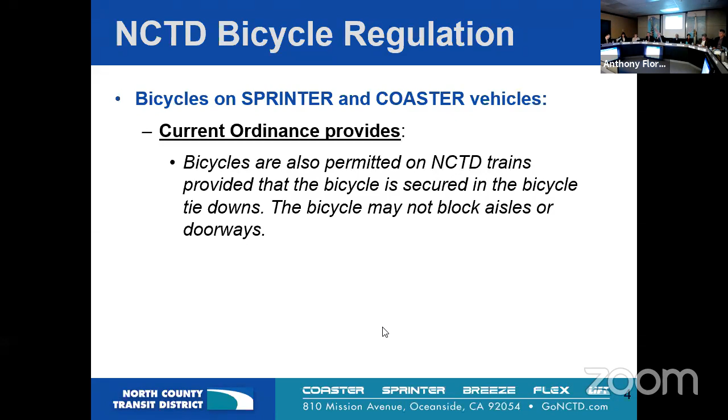Currently we have this one sentence in ordinance 3 that basically says bicycles are permitted. They have to be secured in tie downs, and they can't block aisles or doorways. We just had too many on some of the crowded modes, especially on Sprinter. So this is the proposed revision. I know it's a lot of red, but we've added in some significant improvements.

First, we've added that bicycles can't be left unattended, so that if we do need somebody to move or relocate, they are there and available. We've kept the rule that in no event can they block the doorways, and we've added additional guidance in terms of impeding preferred seating or wheelchair accessibility areas, and that they do have to be moved or relocated upon any direction by our authorized enforcement personnel, which could be an operator, conductor, or any of our TAs. If they are left unsecured or unattended, they can be subject to removal if we do run into a problem. This is pretty much the entirety of the proposed change to ordinance number 3.

It's in section 2.2.a.8, and we have a black line there. To give you an example of what we're talking about, on the Coaster here, we have several bikes in the proper location. There are bicycle tie downs there. That one would be in compliance.

Here on the Sprinter, this one needs a little bit of improvement. It's not totally in the area, it's not tied down. On the Sprinter, we are going to be limited to 5 bicycles—there are essentially 5 tie downs in all of the cars. On the Coaster, depending on which car you're in and how many cars are in the consist, that will change. Some have multitudes, some have designated wheelchair spaces, so that will be a little bit different on the Coaster.

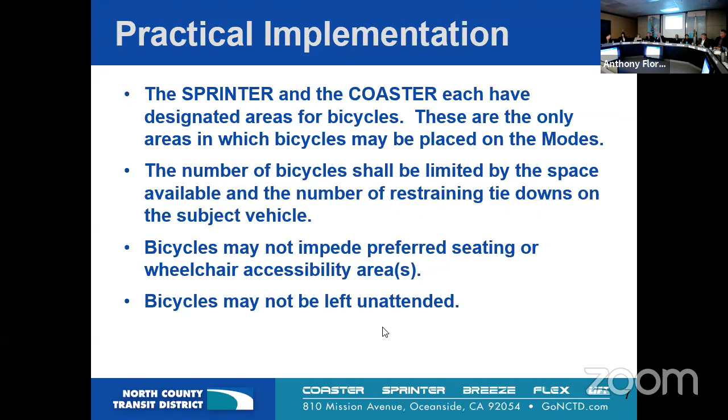We did get one question, basically related to what does unattended mean? Does that mean I can't use the restroom? If you're on the Sprinter, please don't use the restroom—there isn't one there. If you're on the Coaster, that's totally fine, you can go to the bathroom. What we're talking about here is if one of our authorized personnel is requesting that one of these be moved, that person is available. If they go down two cars to meet up with some friends and there's nobody there to take care of that bicycle, then that is going to be subject to removal.

In the same ordinance, and has been there since the beginning, our designated staff is authorized to use discretion when we apply these rules. So if somebody goes upstairs to say hello, or if they go to the restroom, we're not going to be removing a bicycle. But if nobody's available for 45 minutes while we're trying to relocate it, that will be a problem.

So that is the entirety of the change as recommended. There are 5 parts to this because this is a public hearing: receive the proposed modifications, waive the full reading of the ordinance, receive public comment, close the public hearing, and then adopt the proposed modifications to ordinance number 3, the staff's recommendation. I'm here for any questions you may have.

Thank you. I don't have any public speakers, so does the board have any questions or comments? Vice Chair Feller.

What happens if somebody gets on early in the trip with a bicycle and all of a sudden a load of a number of people get on that are disabled or need the access or the places that they're placing the chairs? How does that work?

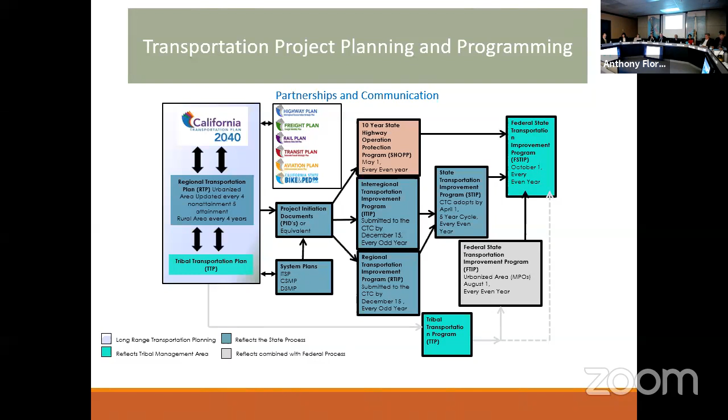Just to illustrate that as we move from planning into programming, once we have dollars realized on a project—funding's not unlimited, right? So it's a matter of balancing our priorities.

Under the overarching mission to provide mobility for all travelers, we need to ensure that the processes, plans, and projects we're moving forward are done safely, that we're providing the safest transportation system in the nation for users and workers, and that we're able to maintain and preserve our existing system, or fix it first.

We want to make sure we can maximize our interregional mobility. For us, for the state, Caltrans, interregional means more of those longer range trips—100-mile plus trips. We also want to make sure that what we put forward supports goods movement and that we're doing this in a sustainable way. We're balancing those first four priorities with our local and regional needs around system performance—are we addressing congestion, how are we looking at moving people locally, what's the mobility here?

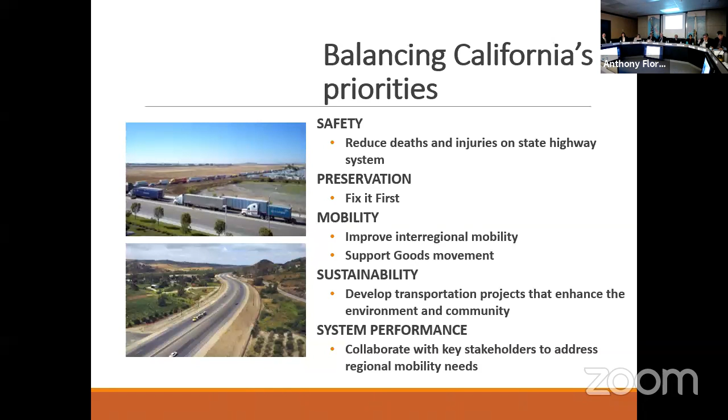So putting it all together, it seems to be fitting all within our current footprint, densifying within the westerlymost areas of our region. And what this is saying is that the existing infrastructure, our current highway network, will still need to remain

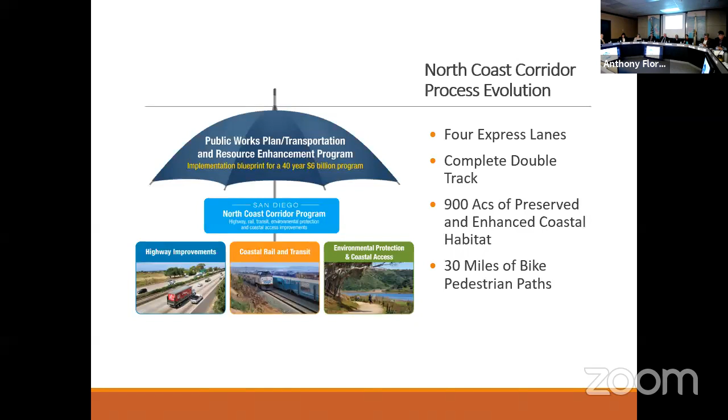Moving forward, over the last 5-6 years there have been new challenges. There's always new challenges hitting a region: reduced revenue, rising project prices. And we've talked about technology, right? Uber and Lyft, the idea of how that could help us with the first mile, last mile, wasn't thought about 5, 6, 7 years ago. The importance of VMT wasn't thought about 10 years ago. So those are examples of how the visions need to be reactive to those changes.

The good news is, as Ann pointed out, we've got a good infrastructure to start from. We've got a good base. The region has grown up around these transportation corridors, your corridors, our corridors, and they're not to be abandoned. The question is, how do we maximize and change those corridors to reflect today's demands?

This shows you your network. Don't need to go through the specifics, but on the I-5, these are from the region's RTP, which was last updated 2015-16. Every 4 years it gets a chance to be reevaluated. Given all the changes that have happened over the last 4 years, we can bring a different blend of projects. We can reprioritize projects.

When you look at just the freeway components in the current RTP, we're building 1 lane in each direction on I-5 right now. The ultimate vision is 2 lanes in each direction as an express lane. Those second lanes in the RTP are towards the back end, 2030, 2035. Same idea over on 78, but it's 1 lane in each direction in the RTP.

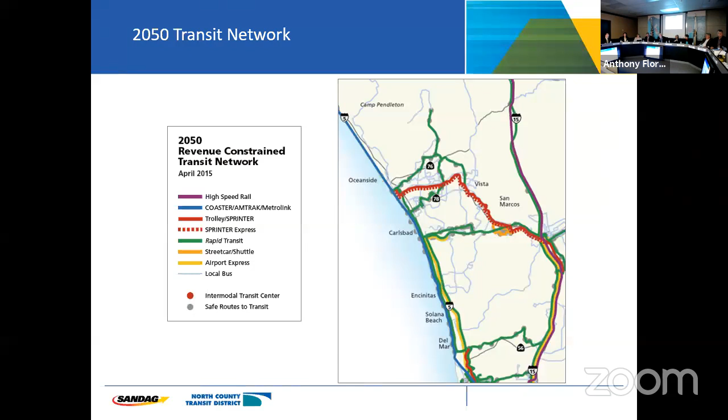Yeah, definitely, and this infographic is trying to communicate that. For example, as connected vehicles become more prevalent, you could convert more general purpose lanes and manage them just for connected vehicles. Or you could decide to use the existing carpool lane as a BRT lane, like we're doing in the Bay Area, in the South Bay. It's a question of how demand changes and whether there's enough ridership to trigger that. A good example: when we started construction three years ago on I-5, we anticipated opening those carpool lanes as carpool lanes only. We're already starting to think about congestion pricing them instead of just carpooling. Haven't made a decision yet, but that shows how flexible we are, because some of the carpool lanes are already full and not really working as intended at the south end. So that's why we may need a new strategy there.

Okay, thank you. And my last one was a comment -- I don't think this picture is the San Elijo Lagoon, I think it's something further north. Oh yeah, I think it's Batiquitos. Yeah, I thought it was Batiquitos too. Sorry. No, you're right, no worries. My comments still hold though -- look at all that extra parkland. Yeah, you got it. Thanks.

I did want to say, on the transit vision that's in the RTP now, there's potential for changing approaches or strategies. The focus was always Coaster -- I think that's appropriate, let's finish the double track, get more frequency, try to up the ridership there. Other corridors have BRT. How does BRT and transit work together, or with rail?

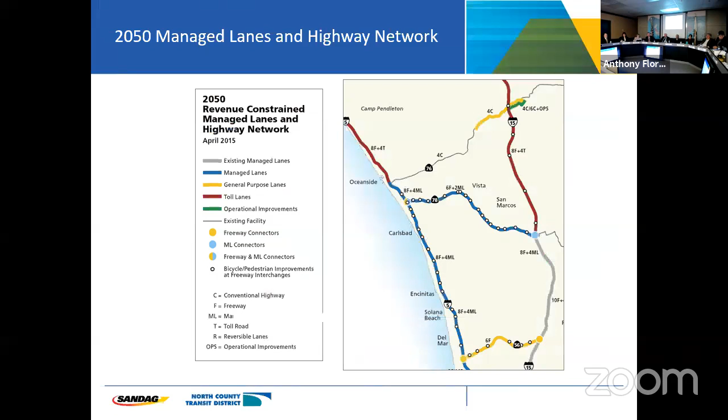And the 2050 plan shows a 78 with managed lanes across the corridor. But on your next slide, there's a corridor re-envisioning. That I don't remember coming to a vote at SANDAG, but this is no longer a managed lane down the center of it. This is managed lanes for part of it and then other fixes along the way. What is this re-envisioning?

I agree with you, we have not - there's no consensus on this vision yet. I think we, Caltrans, have been working to begin to think like, if revenue is not available, how do we get some short-term relief without the whole package?

And so these are some ideas, options that we could present to the board. We don't mean to speak for the prioritization of the different projects.

You talked about the east side being more congested at the 15 and the 78. I noticed there you got a 2025 with little asterisks, and then the I-5 and 78 interchange with the same dates, bubble number 1 and 3 on there. Is that for planning? I'm just wondering what your dates mean.

The dates in there are the current RTP adopted dates that the board has agreed to. For start or for finish? Generally it's a 5-year window, so it's probably somewhere we're going to start in that 5-year window.

Okay, but the asterisk sort of denotes that the whole plan is moving and prioritizing, and in general things seem to be slipping away from us, not advancing in general across the county. I mean, that's, we just...

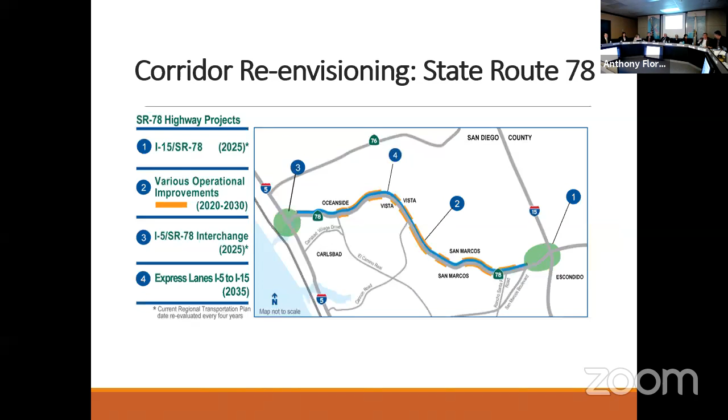All right, thanks. I just wanted to say one more thing. I was 18 in 1966 when I got my first speeding ticket on Highway 5. You're older than I am, I can tell. Yes, yes. All right, thank you both very much.

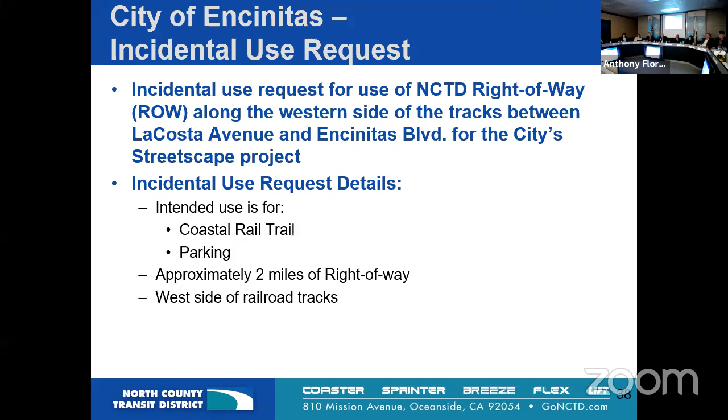The incidental use request as it relates to the city of Encinitas - they submitted a request to NCTD for use. It goes along the western side of the tracks between La Costa Avenue and almost to Encinitas Boulevard, for the city's streetscape project. The intended use as provided to NCTD is for a proposed coastal rail trail or for parking. It's approximately 2 miles of right-of-way along the western side of the railroad tracks. The specific area has not yet been defined.

In December of 2018, NCTD provided a formal response to the city based upon the 30% and 60% design plans for the project. I'm going to go through some of the significant and material issues that we outlined in our response.

One is as it relates to NCTD's property ownership. The city will be required to enter into an agreement with NCTD for the use of the right-of-way, and that agreement will incorporate any city liabilities associated with any deviations to NCTD standards, and the agreement will require board approval.

Our response also explained the preservation of the right-of-way for future uses. The proposed project needs to be compatible with long-range regional planning, and we requested that a consistency review to the regional planning be performed by SANDAG, considering the double-track coastal rail trail, as well as handling the stormwater drainage within that area. That consistency review was provided by SANDAG just last week.

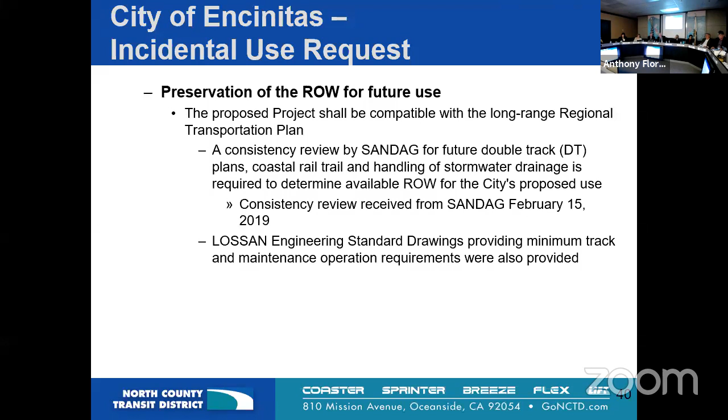We also indicated that any use of the right-of-way needs to consider NCTD's engineering standard drawings, providing minimum track clearance and maintenance operations requirements. So just a little bit, I'm going to sidetrack here and talk about our engineering standards.

We actually have two, and I ate my Wheaties this morning to show you. We have engineering standard drawings as well as design criteria for the San Diego subdivision. This was done and adopted by NCTD and SANDAG both in 2017. So these are the guidance that we follow for all of the projects within the corridor.

Back to our response on the incidental use request - we indicated from a safety perspective that all of the city's improvements need to be fenced to create a separation between the improvements and the active right-of-way. Then from an operation and maintenance perspective, we reserve and require unrestricted access to the tracks for inspection and maintenance.

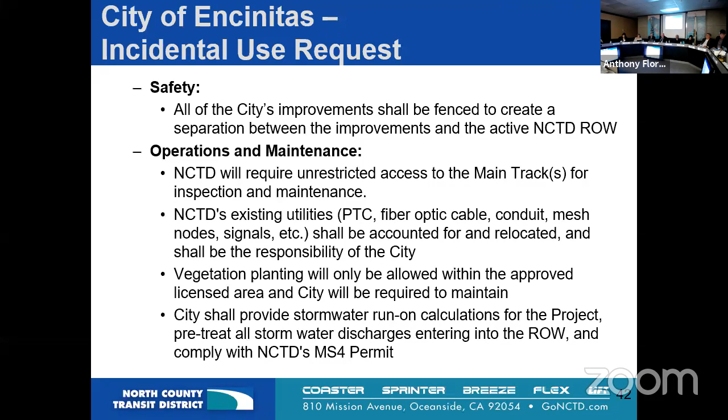Any existing utilities in there, we have our PTC fiber, other fiber optic cable in there, shall all be accounted for and relocated at the city's responsibility. We also indicated that any vegetation planting within the right-of-way has to be within the area that's licensed to the city, and the city would be responsible for maintaining that vegetation, and that the city will need to address stormwater and water issues within the right-of-way.

So our next steps at this point: we have to finalize an incidental use agreement that we'll be bringing back to the board. We have to come to terms on that first. So we're anticipating March. And we will continue to review the city's project plans to ensure that they conform to our incidental use agreements and our policies and procedures. So that's it as it relates to incidental use.

Any questions before I turn it over to Bruce? Okay, it's all yours.

Which button? Oh, Anthony's getting it. Just one second there.

For those board members that don't know me, I joined NCTD in the year 2000, worked here until we finished the Sprinter project, and then transferred to SANDAG with the Senate bill that moved our capital program down to SANDAG. So I've worked for some time on this corridor.

Yesterday, Matt sprung this on me and asked—Mugs wasn't available to do this presentation, so I was asked to do it at the 11th hour. So it's going to be fairly brief.

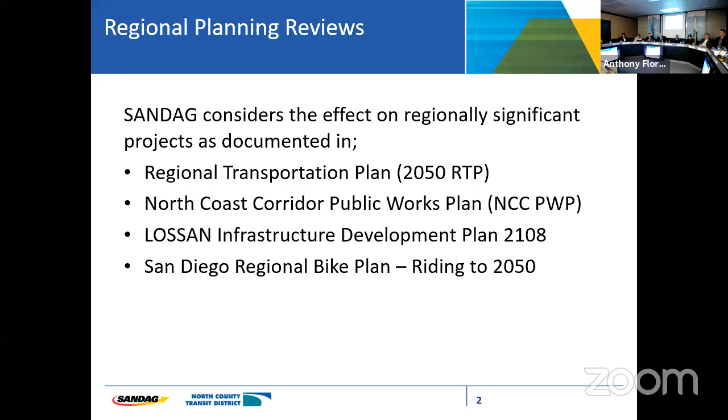So we looked at the regional transportation plan, Caltrans' North Coast Corridor plan that we developed with Caltrans. We also have a LOSSAN infrastructure development plan, which lays out the prioritization of the LOSSAN double tracking projects. And then we have the San Diego regional bike plan. In all these plans, there's a coastal rail trail through Encinitas.

I just put the covers in—Matt asked me to make this sort of part of an awareness presentation as well. There's a lot of plans. We do a lot of planning at SANDAG. So I just put the covers there.

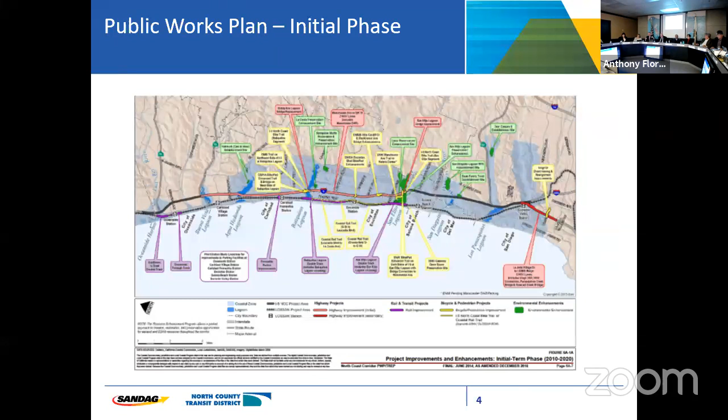One interesting part, this is from the Public Works Plan for the North Coast Corridor. This shows all the projects envisaged in the first phase of the North Coast Corridor program. And again, the Encinitas Coastal Rail Trail is in the plan in the initial phase.

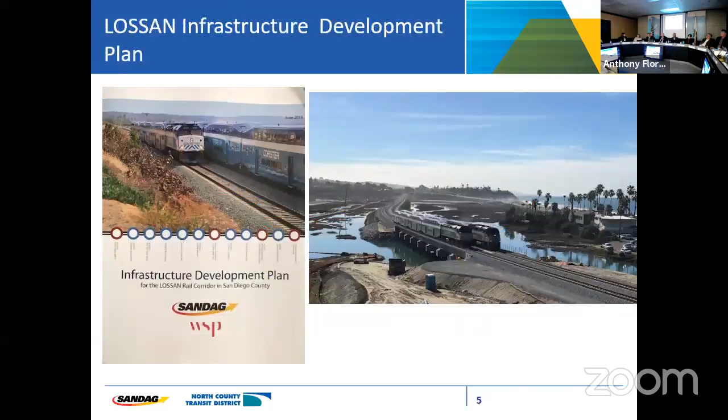Then we have the infrastructure—our LOSSAN infrastructure plan. We've got a host of projects currently in design and construction on the LOSSAN corridor. One photo there shows the San Elijo Lagoon double track, which was brought into service last month.

As Tracy said, we spent quite a few years developing this LOSSAN design criteria, and it lays out requirements for things like flood protection of the tracks. So one of the national requirements we have is that we design all our projects so the tracks are out of the water in a 100-year flood. As soon as the tracks go underwater, trains can't drive over them. So flooding is an important part of the design criteria.

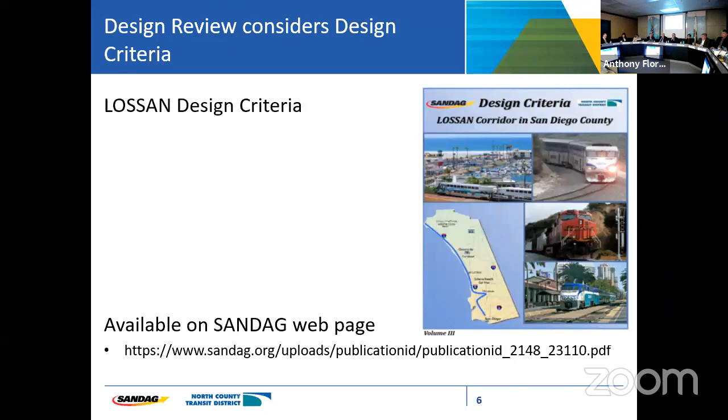We used to stop trains in Sorrento Valley every year until 2015, when we raised the track there by 5 to 6 feet. So there's a lot of good information in that design criteria. However, that design criteria is meant for interstate railway. It's stricter than a city criteria or a county criteria. We go to a higher level because we're dealing with interstate railway.

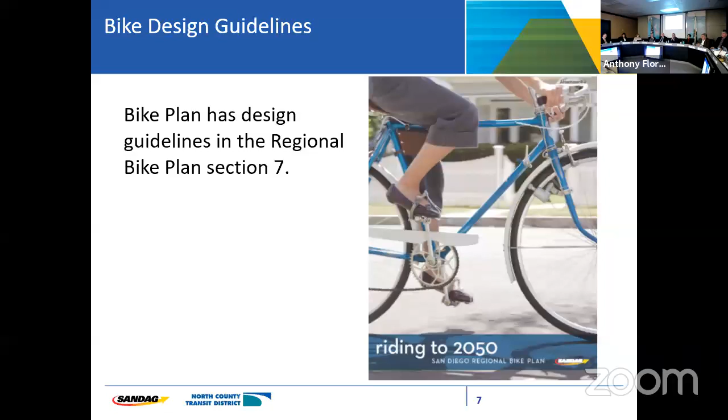Again, we have the regional bike plan out to 2050, and that has section 7, which gives the design guidelines for bike trails. These are the addresses where all these plans can be found.

So we looked at the bike trail running through Leucadia, and at a conceptual level, there just isn't enough room to fit everything in as currently proposed. So we need to advance—I believe Linda's getting a planning grant to advance the study of putting the coastal rail trail through Leucadia. We've looked at it at a very conceptual level, and everything just doesn't fit. So we have to figure out a way to make it all fit. And I think that's the task we'll be undertaking as SANDAG, trying to make everything fit.

But it's a joint venture. NCTD has their requirements, the city has their requirements, the bike plan has its requirements, the LOSSAN plan has its requirements. At the moment, everything doesn't quite fit. And I'm not sure if there's a speaker here from Encinitas—we had quite a long discussion on this last night.

So that's all I've got.

I wanted to make sure we outline the incidental use process from an NCTD and SANDAG joint perspective. That process is something we have to look at for all requests for use of our projects. Our primary purpose is making sure our transit needs are met in the future. So to some degree, whether it's the Encinitas Streetscape project or any other project, we don't necessarily care about the project outside the footprint of what we need to support our operations. We do care about revenue to the degree we're able to gain additional revenue as a matter of incidental use. That should be our priority.

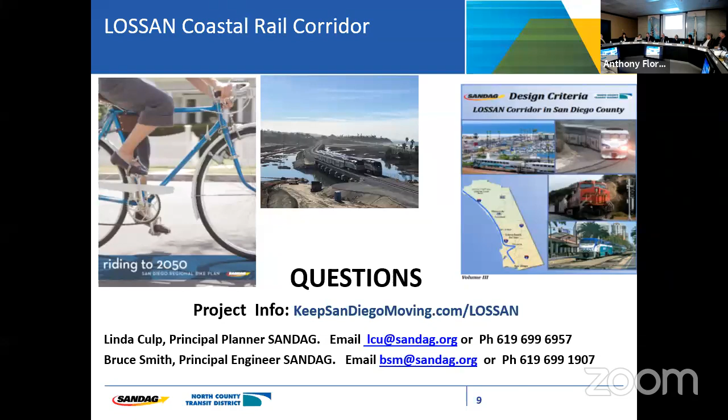I have a question. I'm just looking at a Google view of the train tracks coming through Leucadia or Encinitas, between La Costa and Leucadia Boulevard. I noticed the train tracks are pretty much in the center of the right of way that NCTD has. It'd be nice if we had a graphic of this, but if we're going to double track that, how much are we going to have to move the current tracks west or east, or are you able to double track within the existing footprint? How's that going to work?

There's three starting points. At the Encinitas station, the second track has to be on the east side because the west platform's already built, so there'll be a bridge coming across Encinitas Boulevard, and the track will be on the east side. When we get to Leucadia Boulevard, there's a very sharp drop off on the grade as you go to Coast Highway 101, so the most likely location is 15 feet east of the existing track, but a track shift may be needed there because there's a large amount of water coming out of the city into the right-of-way right on that corner. As you get down to the La Costa overhead bridge, the track's pretty much in the center of the bridge span, so we have to shift the track across 5 feet and then lay the second track next to it.

I guess it'd be nice to see the current track layout and then the future track layout, so we know how much right of way is really going to be used and what's left over.

Yeah, so we were moving towards providing that. The city's changing their plans a little bit, so it's not even at the stage for us. Right now, we're just relying upon our standards, which dictate how much right of way we have to reserve. We also have to account for the drainage facility and the maintenance access that we need there. But until such time that we either advance our project or the city advances theirs, or concurrently, I think the best option is completing the study to look at the corridor holistically. It's tough for us to really understand because we're not that far along in terms of the actual engineering for the railroad improvements. I don't really have any qualms with what Encinitas is trying to do, but we have to protect our right of way and make sure we're able to accommodate the double tracking. So that is my total focus.

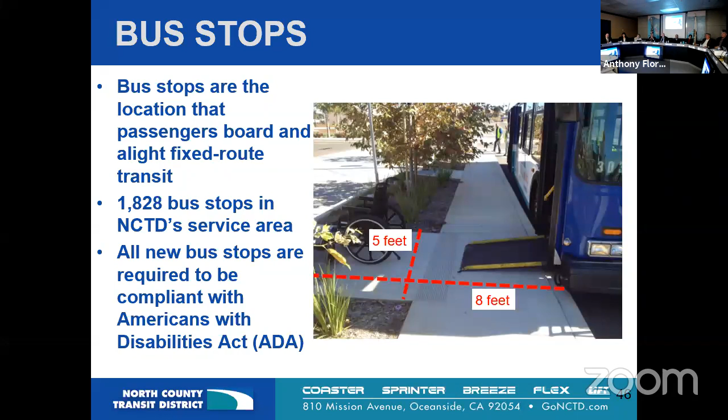Bus stops are the locations where passengers board and alight the bus. We have over 1,800 bus stops in the NCTD service area. All new or updated bus stops are required to be ADA compliant. I included a picture here so you can see what that means. ADA compliance requires a 5-foot wide by 8-foot deep bus stop pad, or a 5-foot wide pad, so that a person in a wheelchair can get on and off the bus using the lift once it's deployed, and maneuver around.

NCTD does have standards for bus stop design. These were approved back in 2013 and are included in NCTD's Bus Stop Development Handbook. They pertain to bus stop spacing and the provision of bus stop furniture, and typically we base this on population density—so in denser areas, we're going to have bus stops that are closer together. Based on utilization, if we have bus stops with high ridership, we're going to provide more amenities at those stops. I'll preface that by saying we don't only look at ridership at a stop when considering amenities, but also surrounding land uses and facilities. So if we have a facility such as a senior center or an adult daycare center for persons with disabilities, we would look at providing a higher amenity of furniture at those stops to serve that population.

So these are a couple pictures of bus stop furniture. On the left, you can see a bus stop bench and an ADA pad, and on the right, we've got our standard shelter, bench, and trash can.

The goals of NCTD's bus stop optimization program are to really right-size the system. We've got a lot of stops spaced very close together, so we're looking at consolidating those stops, and then making improvements to stops where we currently have furniture that needs to be replaced past its useful life, or adding furniture and ADA compliance to stops with high utilization.

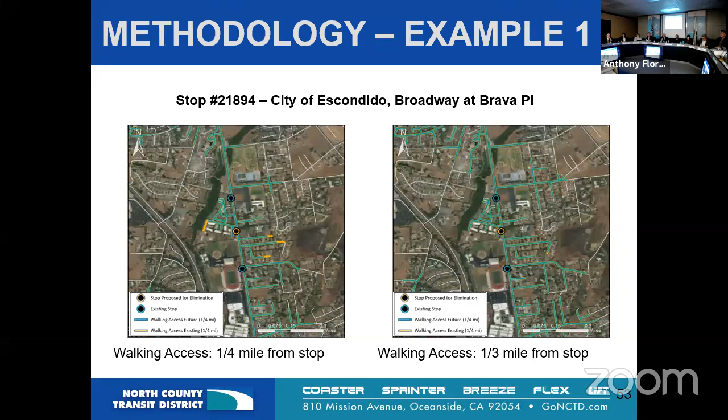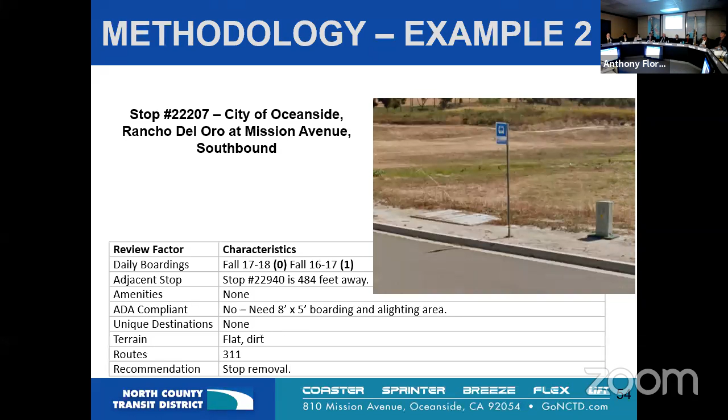The next slide will show you. So the stop is up at the top there in the yellow that we're proposing to eliminate, and right around the corner to the left is the other existing stop. These are located on an abandoned field, and it just makes sense to consolidate our stops at this area.

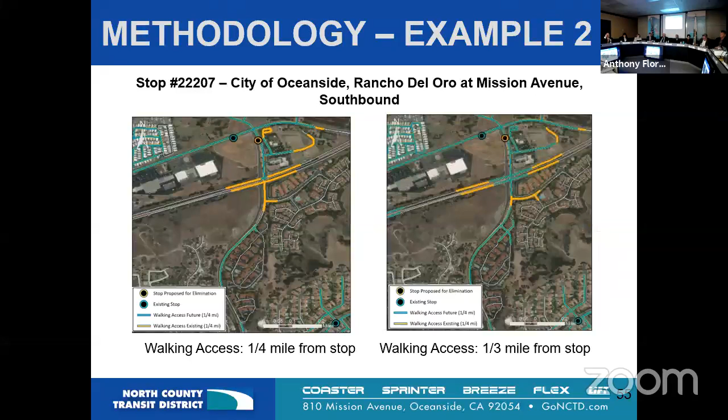Transit agencies are required to review any major service changes for Title VI impacts to disadvantaged communities. The FTA requires transit agencies to set their own standard for what a major service change is, and the board adopted policy number 30 a few years ago that defined a major service change as a 25% change or more in service characteristics - route miles, route hours, number of bus stops, for example. With these 92 eliminations, that only makes up 5.5% of NCTD's bus stops. Therefore, it doesn't qualify as a major service change or needing a Title VI analysis.

So the public notification for the first phase, as you're all aware, we sent letters to the city managers, with a copy to you as well, to advise them of the stops that we're proposing to eliminate. We've got a little bit of feedback and we've done some follow-up with the cities to clarify what our methodology was. I know we're still planning on having a meeting next week with the Solana Beach staff to make sure that everyone's clear on what's proposed and that NCTD is aware of any recommendations that they have.

At least 30 days before we eliminate the stop, NCTD will issue a press release. We'll be posting notification at each of the stops that are proposed for elimination, and we'll also be posting this information on our website. The notification on the stops will have the phone number of our customer service center or email so folks can call and ask or make a comment if they have any concerns. And then on April 7th, we will bag and discontinue the stops, and through the next two weeks, our facilities contractor will be removing the poles and the signs.

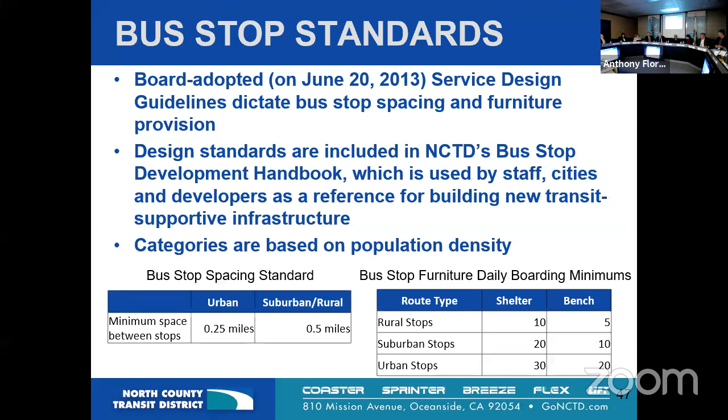Vice Chair Feller: I noticed Del Mar's not feeling the love here with eliminating bus stops. So is there only one bus stop there, or? At this point, none of those stops met the criteria for the first phase, so essentially the spacing - they can't have more than one bus stop because it's only a mile long. There are actually 6 bus stops in Del Mar. Well, they need to be eliminating some of those.

I wanted to know what is very close. So as we said, our standard is a quarter mile. So very close would essentially be anything less than that, and that's again prefaced by what's in that location. So are there facilities for seniors? It's every stop, we have to look at that specific site, but as a guideline it's a quarter mile. So that's one lap around the track, which isn't really too bad.

Jim Desmond: I have a couple - there's Capistrano Drive, we eliminated the bus service out there some time ago. There's at least one bus stop - I think I let Anthony know, or somebody, that there's no bench, just a platform and a cover. And then there's another one in front of North Terrace School. I don't know if that's a problem to eliminate, but it's probably shelter for the school kids.

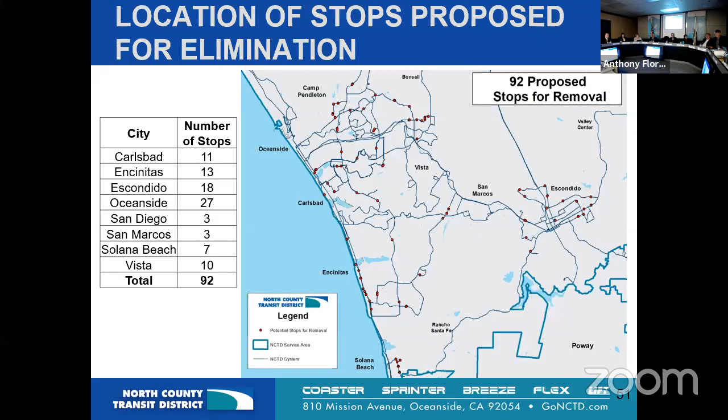Okay, any other questions? Thank you for the presentation and the letters. We'll move into item number 17. Mr. Tucker will introduce the monthly intergovernmental affairs reports.

Yes, so Richard Harmon, our state representative, is going to provide a presentation on a potential NCTD sales tax initiative. This came up as a topic of discussion at the board retreat, and I wanted to have Richard come in and provide some information to the board so that you guys would be in a position to provide feedback and direction to staff. Richard, thank you. Richard Harmon with Townsend Public Affairs, the district's Sacramento advocate.

I will be expeditious in moving through some of this. Got a little bit of background to go through so we can get to some key takeaways and then the next steps, but really want to make sure we set the stage. It was actually a pleasure to see most of you at the board retreat. Thanks for having me there. I thought it was very informative. Look forward to the next one.

As most of you know, under state law, cities and counties are allowed to impose transactions and use taxes, often called add-on taxes, to the state sales tax of currently 7.25%, so long as that rate doesn't exceed 2%. State law has also been amended a number of times to allow different entities to also impose taxes, and one of those relevant to today's discussion is SANDAG.

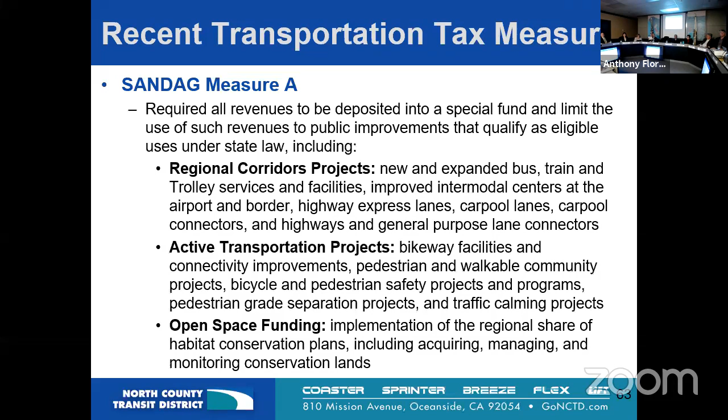A critical one, as you're talking about different projects, is that it requires environmental mitigation, so you can plan for those activities. It allowed for transit operator funding and then a variety of grants programs. So a lot of different avenues for transit to benefit from a measure such as this.

So as well in Measure A, it told Sandag, you want to make sure you're leveraging local, private, federal, state, other resources. Required a 2/3 vote of the Sandag board to basically amend certain provisions. And it also required all the agencies that would be receiving funding to maintain their current level of funding for those programs. At the state level, we call this maintenance of effort, making sure that new tax dollars aren't supplanting anything that local agencies should already be paying for.

It had several other provisions, including timeframes for when some of the larger projects would be completed. Specified here some of the corridors as well as transit and rail improvements, specified those timeframes for completion, as well as utilizing local workforce, so 80% to 100% local workers on capital projects, and that workers be skilled and trained in the process.

Required oversight. Again, most measures require oversight of the program. Would have become effective November 9th, 2016, and operative on April 1st of the following year, 2017. So this tax would have required a 2/3 vote of the electorate, so 66.67%. And as you all, I hope it's not a spoiler alert, it failed countywide with only 58% to 42%. So it failed by about 8 percentage points from passage.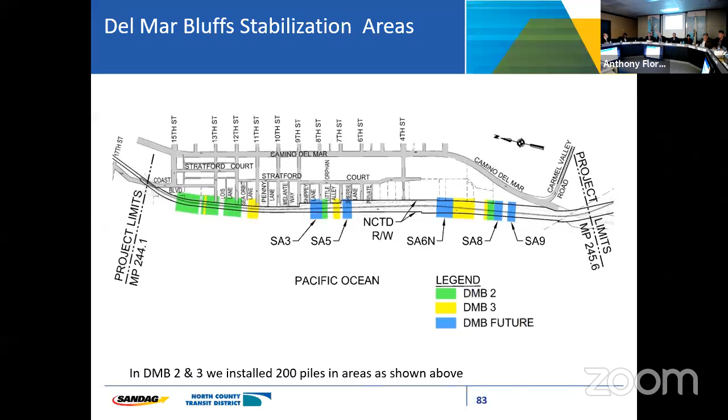This map shows the high priority areas we've done and that we're planning to do in the future. The green areas are what we did in Del Mar Project 2, the yellow in Project 3, and in 5 and 6 we're looking at doing the blue areas. Again, it's not the whole bluffs, because in some places there's a lot of room between the tracks and the edge of the bluff, so it's not needed everywhere. As I said before, there's about 200 piles down through the Del Mar Bluffs area.

So in the short term, we've got the Bluffs 4 update. In the midterm, we're looking at what we're calling our 2050 stabilization plan. And in the long term, there's tunnel options being considered.

For Project 4, we're repairing drainage structures and putting some piles in to maintain access and to support drainage structures. We've got a budget of 3 million dollars. The preliminary engineering is complete, we've got environmental clearance from the FTA, and we got a coastal permit last week. We've got Regional Board and Corps of Engineers permits still outstanding, and we're hoping to be in construction in the fall.

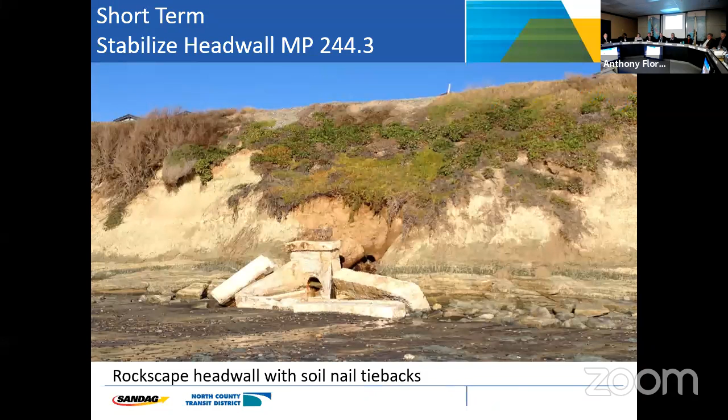This is an example of one of the drainage structures that has collapsed on the beach. We'll be putting a soil nail wall on the face of the bluff behind where the pipe is and casting a new head wall on the bluff.

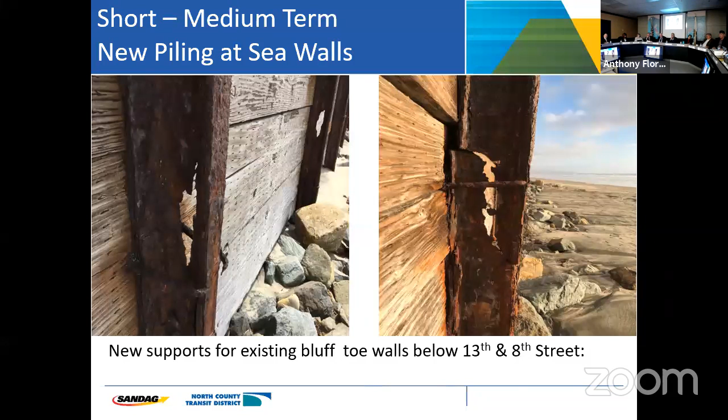It's another example of these toe protection walls that act to stop the sea from eating away at the toe of the bluff. They were built in the 40s and are in need of repair. So all we're going to do is replace the supports on those walls.

Then we've got this drainage chute built in 1912. We haven't got enough money to replace it at this time, so all we're going to do is cast a block of concrete around the outlet so it doesn't fall over.

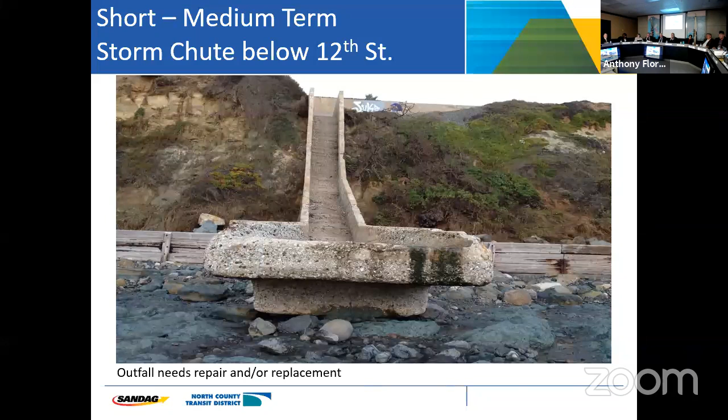So that's Project 4. The medium-term plan, we've been tasked with figuring out what we need to do to get us to 2050, which is the regional plan planning date. The bluffs are going to retreat up to 6 inches a year, so we're going to need to stabilize the old drainage structures like that chute.

We're going to need to repair all the seawalls. Ultimately, in Project 6, we want to do bluff toe protection. And then we've got some choices to make: we either put in more piles and tiebacks, a lag between the piles as the bluff retreats, or we stabilize the whole bluff face. We're estimating $70 to $90 million to do that work.

In Del Mar 5, our basic aim is to increase the seismic stability of the whole length of the bluffs to an acceptable level by today's design codes and replace some of the old drainage structures. We've estimated we need about $3.4 million to design and get environmental clearance on that project before we go out and look for construction funds.

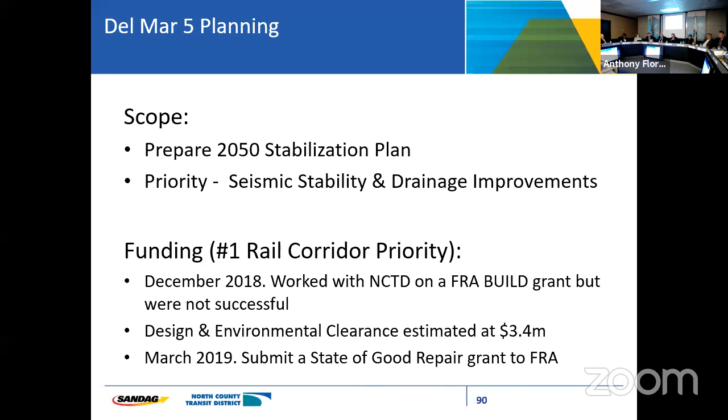We've applied, or we're in the process of applying with NCTD for a State of Good Repair grant with the FRA. I think we're asking for $24 million, which will cover design and construction. But the urgent need is to get the design started so we can be shovel ready.

And then Project 6, this is the Coastal Commission asking us, well, what are we doing about sea level rise and bluff retreat? So we said to them we would go away and look at it and come back with a plan.

They've actually conditioned this work as part of the permit for Project 4, that we work with Del Mar City on access requirements, look at how we can stabilize the bluff face and provide pedestrian access. Again, we're looking to start the design of that project as soon as we can get $6.6 million allocated.

Long term, I'll be very brief on this. I'm an engineer, not in the planning department, but the long-term plan is we've looked at alternatives for a tunnel when we designed the bridge at the fairgrounds. We wanted to make sure no wasted work would be done when we replaced the bridge at the fairgrounds. So our executive director said, look at tunnel alternatives and see if it affects the San Dieguito bridge replacement. That was the purpose of this study.

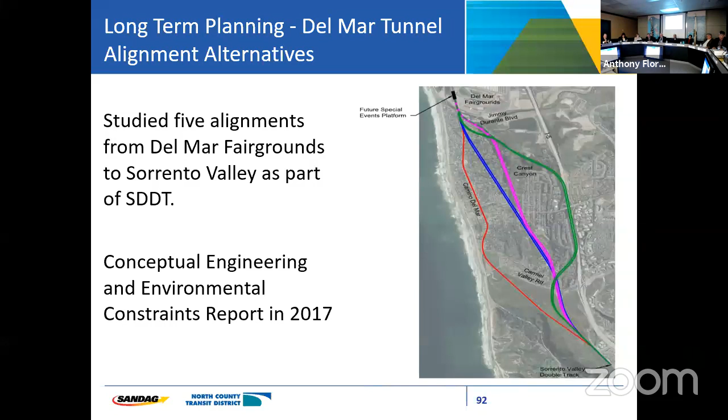$2.5 billion. The straightest way through is to go straight from Bridge 243 across Sorrento Valley and go under Rose Canyon with a bored tunnel. The estimate there is for a double track tunnel, and that would take almost 3 minutes off the travel time. But again, we're looking at large sums of money.

So the next steps: we want to secure funding to do the coastal access study. We're permitting Project 4. We're going to prepare the 2050 stabilization plan. We're trying to secure funding for Project 5, and then design funding for Project 6.

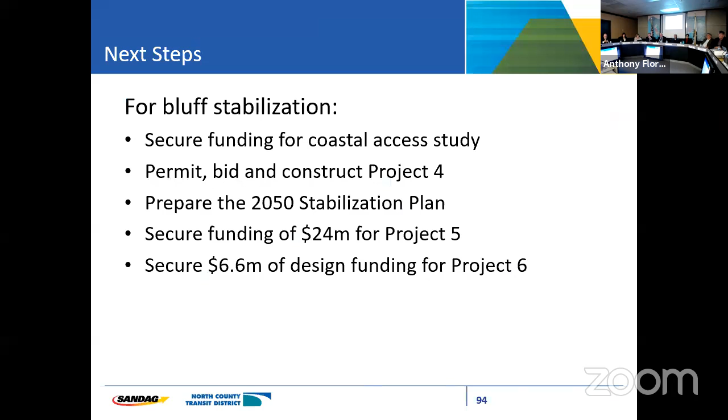And again, I would just repeat what Matt said. We'd appreciate help when we apply for these grant funds from board members to help motivate the state and federal elected officials to help us.

Thank you. And when the bluff collapses, we shut down the rail line and we get in.

Leighton and Associates has been the geotechnical engineer of record since they did the Del Mar Bluffs geotech study, and we've had them on our team ever since. They're the most knowledgeable on the bluff geology, so they send a geologist out to inspect the bluffs. Typically what happens is the lifesavers will call in and say there's been a slide. Then we'll send the geologist out, they'll look at it, make a report and a determination, and then train traffic will start up again.

Do we start bus bridges right away, or how do we assess that? We start the process because, as we've learned, the worst thing you can do is wait an hour to start the bus bridge, then actually need it. So we start immediately planning for the bus bridge, and then we make a determination as we're planning whether or not to just cancel the bus bridge.

And if a train was northbound leaving Sorrento Valley, headed north, and this incident happened, would it stop and sit in place, or would it go back to the station? That depends. Within our operations control center, we've set up an entire service management integrated function, so all of those operational decisions are made between rail dispatch and service management. I couldn't give you an answer today because I would have to know the specific incident.

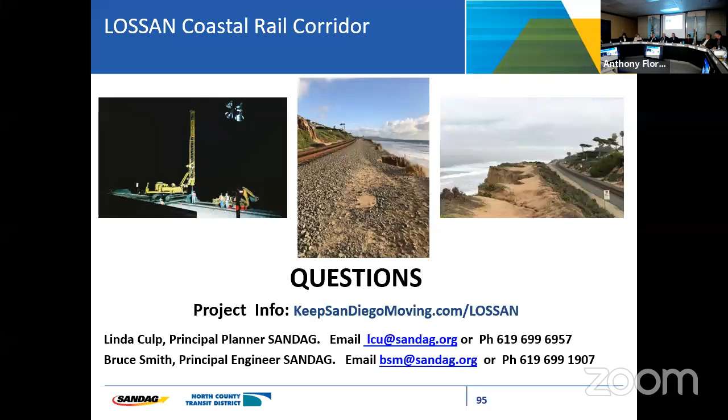Board Member Drucker. Yeah, obviously huge comments here. If you could go back to the pictures, I think it's slide.

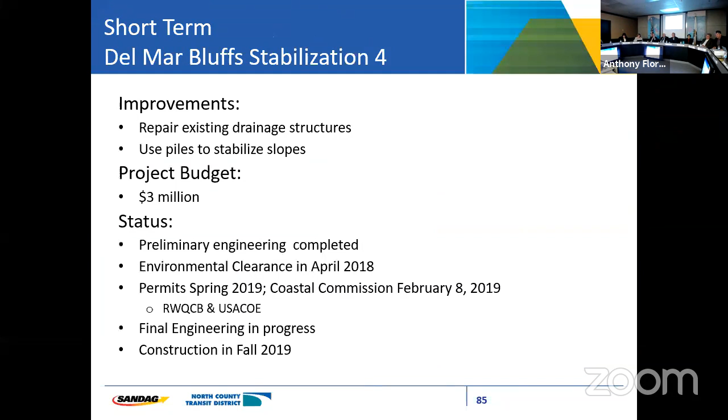This one? I can't see slide 5. Actually, start with slide 3. What is it of? It's a picture of between 10th or 11th and 12th—11th and 8th, I'm sorry. No, it's the one—keep going. Right there, that one.

That area there is between 11th and 8th Street in Del Mar. That used to be 50 feet wide. When I first moved to Del Mar 32 years ago, that was 50 feet wide. You can't walk it any longer. There's a spot that's only maybe 6 inches wide at this point.

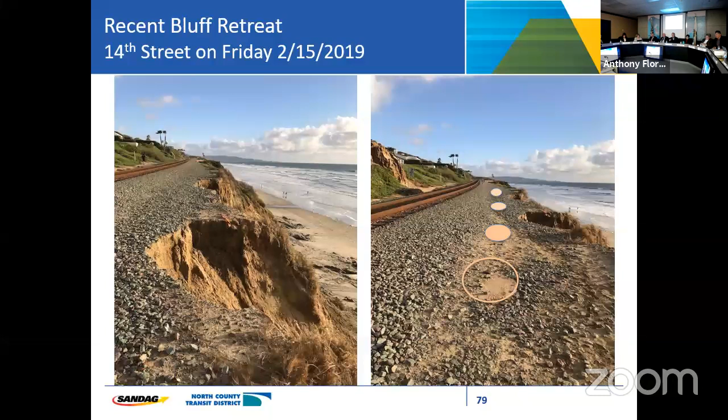So go forward, keep going. As you can see, there's piles there. If there were no piles there, this would be extremely unsafe—we'd have an emergency project if there weren't piles there. Right now, this is not good. I did walk it, and it's almost unwalkable. There's a spot there just to the south where some emergency repairs were done.

Those emergency repairs are also sliding away, so there's some other problems there. Okay, stop there—this is where the train fell into the ocean in 1940. A freight train fell in, killed a couple of people, the two engineers. What's interesting is that is all cinders there, not bluff—it's an old creek bed that they filled in so the train could run on a horizontal path. This is not bluff, that was the problem—it's cinders.

My comment at this point is that putting piles at the bluff face propping it up is not going to solve anything, because most of the erosion here is due to irrigation. That irrigation water is going to continue to slough off the bluff no matter what. Lagging is probably the only thing we can do to ensure the tracks stay on the bluff. Obviously Del Mar will be pushing for a tunnel, and we'll push very hard for a tunnel—the tracks just don't belong on the bluff any longer.

Originally the tracks were not on the bluff—they were on Stratford Court. In 1910, some people decided to make Del Mar's train station the center of town, and they said to do that, we need to put the tracks on the bluff. They had to fill it in with a bunch of cinders, because these are old creek beds, which is where a lot of the problems are. The track at this point just doesn't belong on the bluff. So that's my comment.

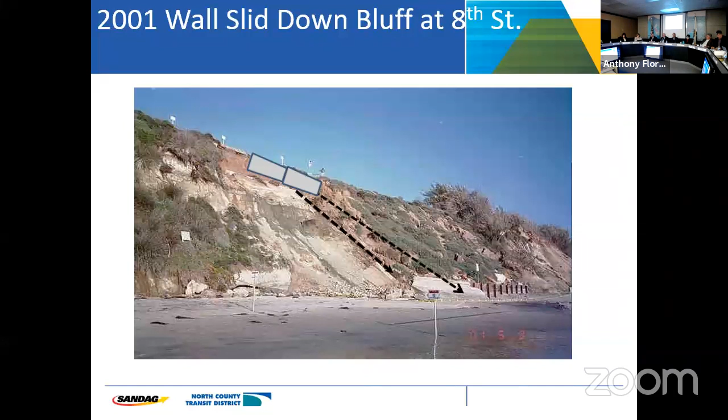Any other comments or questions? Hearing none, then we will head into closed session. And I was remiss in not welcoming General Counsel Winfrey back—great to have you. If you would now take us into closed session, I would appreciate it. All right, so the board's going to go into closed session pursuant to Government Code Section 54956.9, subsection D4, to discuss one potential case of anticipated litigation.